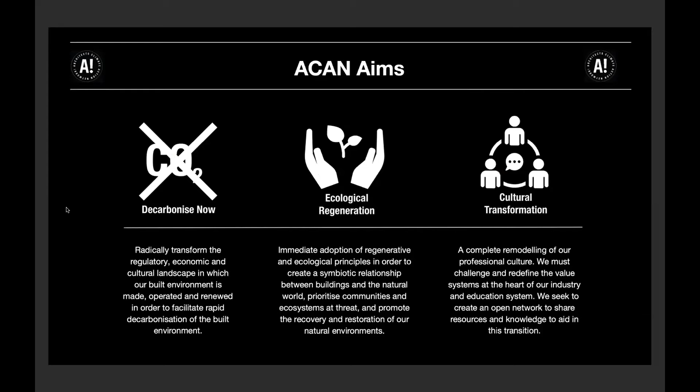Hello. For everyone new to ACAN, we are an open voluntary network of individuals in the built environment industry. Formed in April 2019, it has now grown into a global network of over 3,000 people. It started with a vision for how we could work autonomously as a collective of individuals in order to make rapid decisions and respond quickly to the climate emergency. Our manifesto has three overarching aims: decarbonize now, ecological regeneration, and cultural transformation. You can read more about these here and on the ACAN website.

ACAN is made up of many groups, including 9 thematic groups, of which natural materials is one. Each group is made up of individuals who want to make change happen, and a couple of people from each group take a coordination role to help facilitate the group and any actions. You can hear more about what else is going on in the other groups by joining ACAN, and we will share a link to the other groups in the chat box.

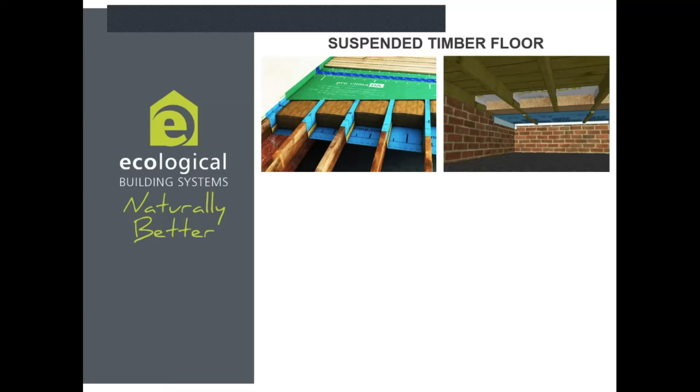Today I'm going to talk about how to thermally upgrade existing floors in traditional buildings. The aim of the presentation is to outline a few methods of insulating ground floors with natural diffusion vapor open materials. That's going to cover suspended timber floors, insulating from above or from below, and moving on to solid floor refurbishment with an insulated screed and glass foam aggregates.

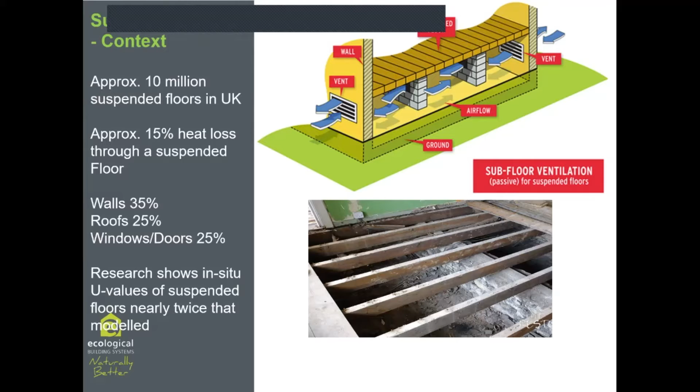It's estimated that there are about 10 million suspended timber floors in the UK. Typically, suspended floors are responsible for around 15% of the heat loss through the fabric of the building. For context, walls are responsible for about 35% of heat losses, the roofs about 25%, and the windows, doors and openings around 25%.

This image shows the typical construction of a suspended timber floor prior to the upgrade. You can see a good separation between the floor joists and the ground below. This is for two reasons: first, it prevents the timber joists from coming into contact with the ground moisture; second, the space below the joists enables the void to be ventilated, achieving moisture or humidity regulation in that crawl space, which is achieved via air bricks.

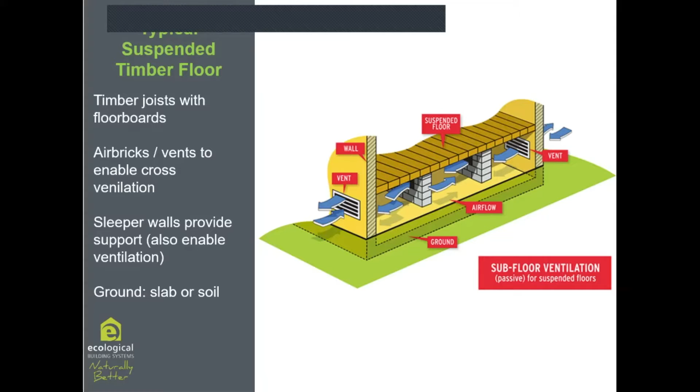The ground below could be either just soil or a concrete slab, for example. And if the ground is particularly damp, you have the option to lay down a damp-proof membrane to eliminate or reduce the humidity that's coming upwards.

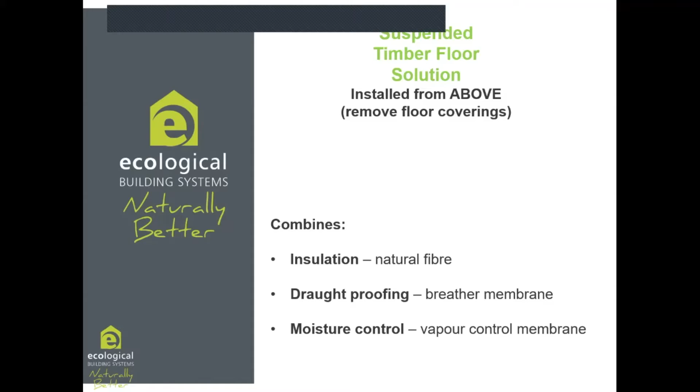So the first thing I'm going to say about the suspended timber floors is how to insulate from above by removing the floor coverings. This methodology incorporates three main aspects. That's the natural fibrous insulation, which is diffusion open, what we call breathable, and also two types of membranes: a draft-proof membrane, which is an airtight but vapor open membrane, and the moisture control membrane, which is an airtight but vapor closed membrane, and I will explain. So basically that's the system we suggest from above.

Well, starting from below, it's the soil, and then the well-ventilated crawl space, and then above that, what we do is that we drape the blue membrane up and over in between the span of the joists, and create like a cradle for the insulation. So we pin the blue membrane on the side of the joists, and there are four purposes basically for this membrane. The first is to eliminate the thermal bypass.

You can see that the membrane is actually sealed on the overlaps, and also it's sealed on the perimeter. So it's very, very well sealed, and it's isolating the air from below to above. So there is no chance that the air gets into the insulating zone, because if air gets into the insulating zone, then the performance of the insulation is significantly reduced because of thermal loops, convective loops.

So that's the first. The second is this membrane provides draft proofing across the full surface of the floor, so no cold air from below passes through the membrane or from any gaps into the warm space above, into the rooms. The third is that, as I said, it creates a supporting substrate for the insulation. And the fourth is that being vapor open, it helps everything to stay dry. So it has the capacity to allow the moisture to pass through and be ventilated out through the well-ventilated crawl space.

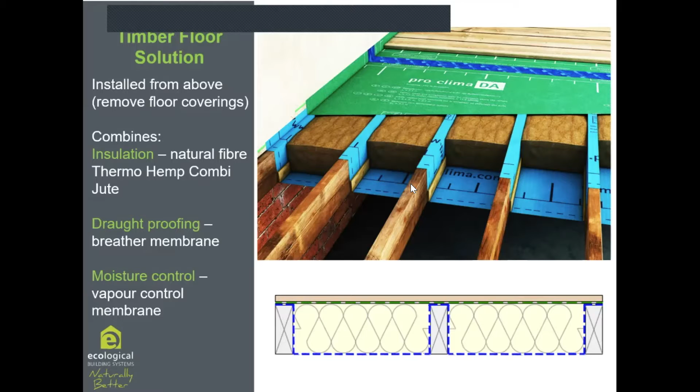As you can see here, it's also taped on the overlaps and sealed on the perimeter, either with a mastic or a tape. So we have a fully enclosed envelope there that performs well from the thermal point of view as well as the moisture point of view, because this membrane, being a vapor control membrane, won't allow any moisture to pass through from above, from the vapor that is in the room towards the insulating zone. So that's the system from above.

Now we tend to avoid using rigid insulation because rigid insulation allows for gaps and won't be fitted perfectly in between the joists. So all these gaps allow for air movement, and the air movement, as I said, creates thermal bypass, convective loops, and that significantly degrades the performance of the insulation, as well as increases the moisture risk. So yeah, we go for flexible insulation.

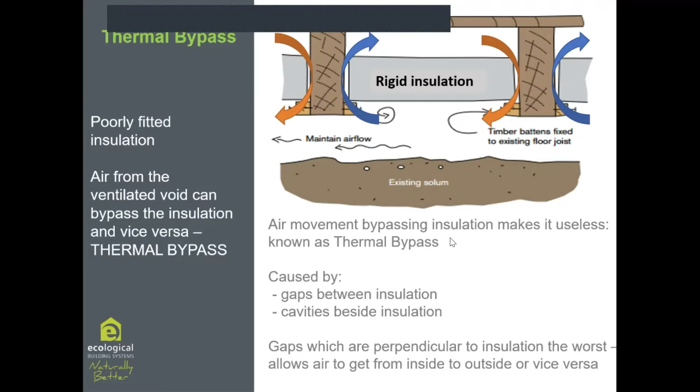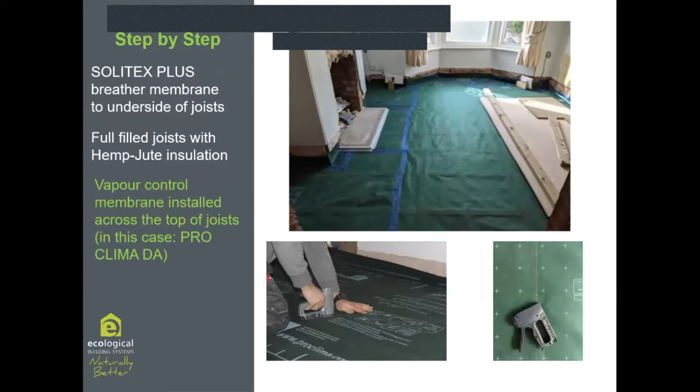And here is an example of that methodology being applied in real life. You can see how the membrane is installed, pinned with supporting batting on the side of the joists, fully sealed on the overlaps and the perimeter, then fully filled with the fibrous natural insulation, hemp jute again in this case, and then on the top sealed with the vapor control membrane. Again, the membrane is taped on the overlaps and the perimeter.

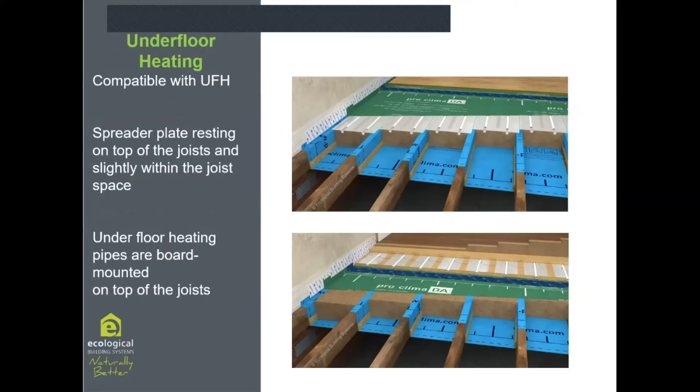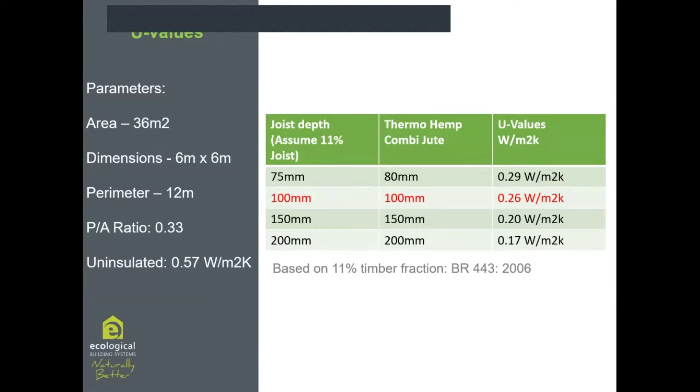This system can accommodate underfloor heating, either aluminum trays or a pre-routed board, so that sits on the top of the joists in both cases. And just to give you an indication of the U values, for a typical 100 millimeter deep joist floor, fully filled with Thermo-Hemp Combi Jute insulation, the U value is 0.26 watts per square meter per Kelvin. And that's for a specific P/A ratio and area, but yeah, just to give you a rough indication of the figures. So that was from above.

Now there are cases where either we want to avoid internal disruption, or it's impossible to remove the floor coverings or the floorboards, and we want to insulate. The only option is to insulate from below. Of course, that requires enough space to work from below, but this gives us the opportunity to also add some more insulation under the joists. This could cut the thermal bridges of the timber and also reduce the overall U value.

So that's the system from below. Again, you can see we use a membrane. Now start from the top. Instead of the green membrane, we use a membrane called Intello Plus. Again, this membrane is an airtight and vapor control membrane. The only difference is that we cut this membrane in strips. So we pin and we seal the membrane on the sides of the timber on each span.

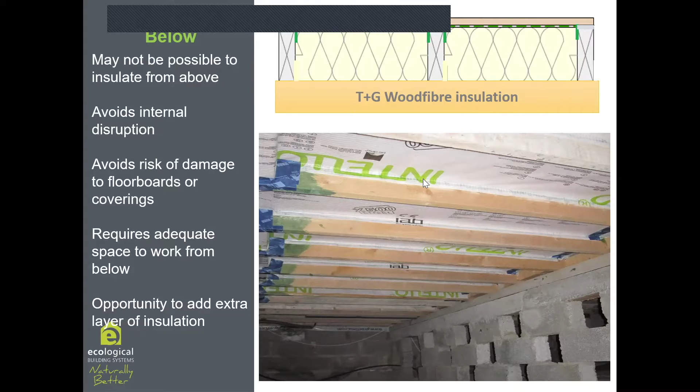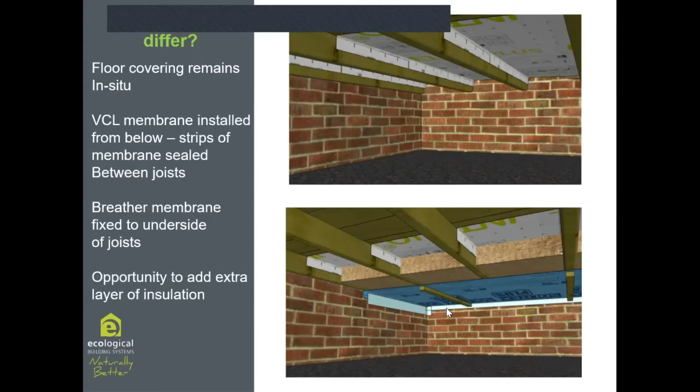And then, yeah, you can see that here. And then we fill with friction-fitted insulation, again, flexible insulation, typically hemp jute insulation. And then on the bottom, we use exactly the same membrane as previously, the blue membrane, the wind-tight and vapor open membrane called Solitex Plus. And below that, we stabilize the membrane using some battens along the joists too.

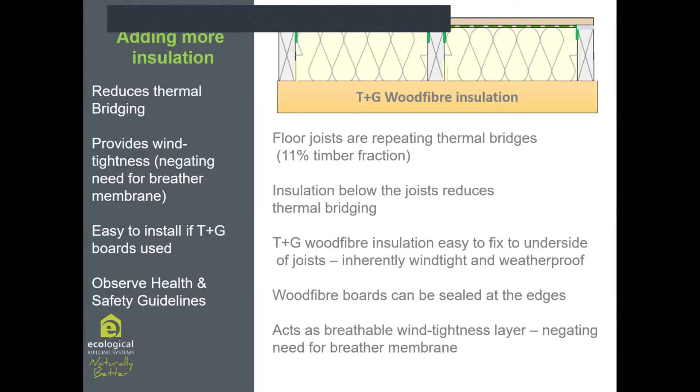So that's one option. Another option is, instead of using as a finish layer the Solitex Plus membrane, the blue membrane, we can use a tongue and grooved wood fiber board that interlocks on the bottom of the joists. And as I said, this way we improve the U value slightly more, and we also cut the thermal bridges of the timber. And again, just to give you an indication, previously we were talking about a U value of 0.26, but by adding 60 millimeter wood fiber board underneath the joists, that improves down to 0.18.

And of course, the floors, when we take up the floorboards, in some cases we meet ugly stuff in there, or in most of the cases. And probably we won't be able to tape properly, for example, the perimeter and everything. I mean, theoretically, everything is fine and easy, but in reality, this may be difficult. So instead of using a tape or a mastic, we have another product we suggest.

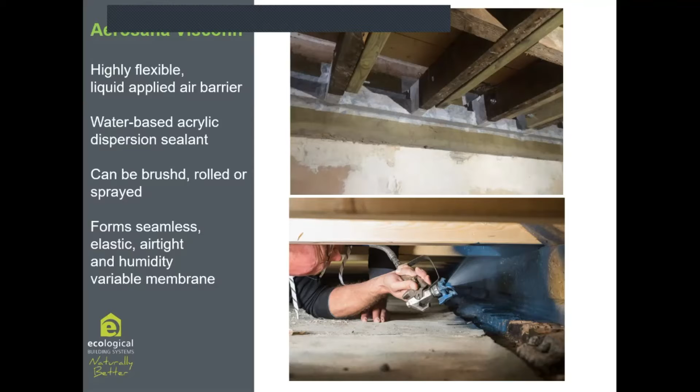It's called Aerosana Visconn. That is a very flexible liquid applied air barrier. Basically, you can either spray it from a distance or from close. So whenever you don't have access or the substrate is not suitable for taping, you can use the Aerosana, and that's a great option for air sealing around different ugly details.

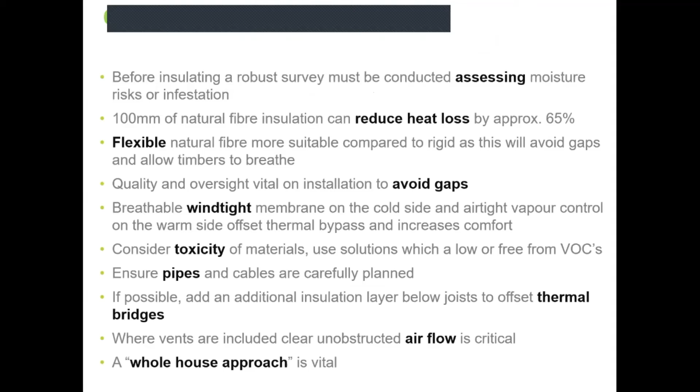So that was for suspended timber floors. Now, moving on to the solid floors. You probably come across this very typical system for insulating the floors: dig down, fill with gravel, kind of like glass foam aggregates, which is a very good insulator, and then lay on top a lime-based screed. So from bottom to top, it's the soil, then a separating geotextile membrane, then the glass foam aggregates, then another layer of the membrane, and then the lime-based screed on top.

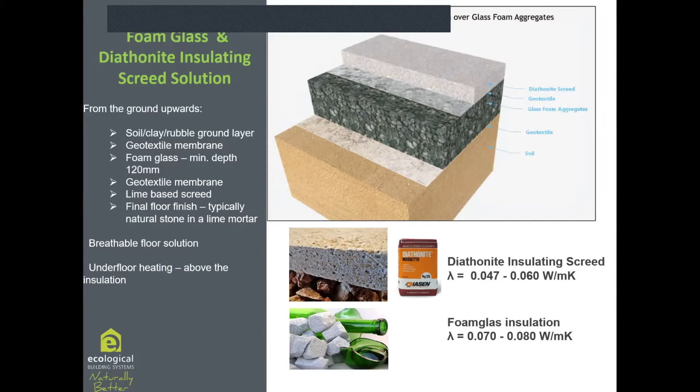Now you can find that system with just lime screed, or we suggest using a Diathonite screed, which is a lime and cork based screed with a very good lambda value, thermal conductivity. So in this case, you can see the standard cement screed has a thermal conductivity of 0.4, the lime screed or a hemp screed 0.08, whereas the Diathonite screed has, actually there are two variations, one with 0.047 and another one with 0.060 watts per meter per Kelvin thermal conductivity.

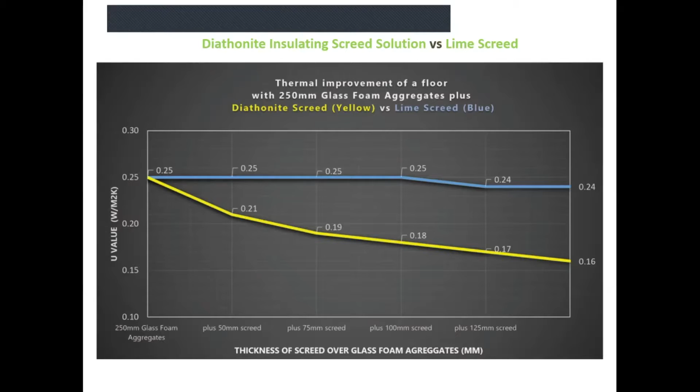And I have a comparison chart here showing how you can further improve the U value by using 50 millimeters of the Diathonite screed instead of a normal lime screed, for example, or 75 millimeters of Diathonite, and so on. So if you are tight on space, then Diathonite screed may be very beneficial. Because with the glass foam aggregates, if you have enough space, you can fill, I don't know, 500 or 600 millimeter thickness of glass foam, and glass foam is a great insulator too, so this may do the job.

But there are cases where the space is very limited, and you can only apply maybe 110, 120 millimeters of glass foam. Then in this case, using the Diathonite screed over the top of the glass foam aggregates could prove very beneficial.

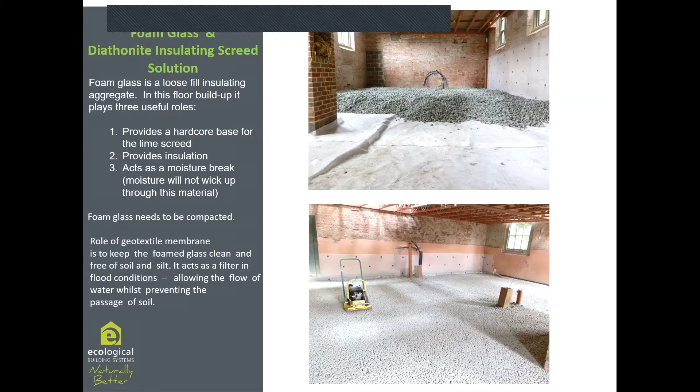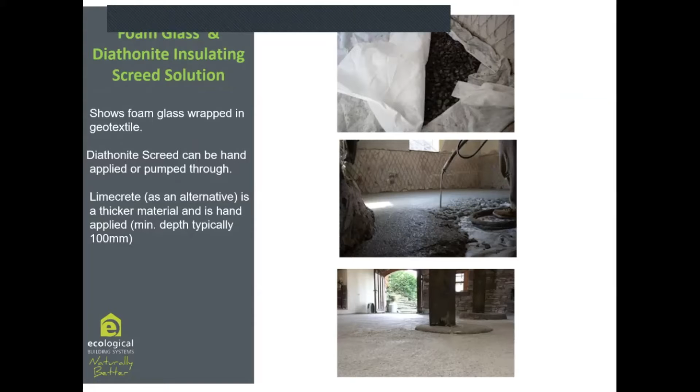You can see here how the glass foam aggregates are wrapped in between those two membranes, and then the screed can be laid on the top, and that's the final finish. On the top, you can apply either tiles or timber floorboards, or even just the carpet. Or in some cases, I've seen people polishing that screed.

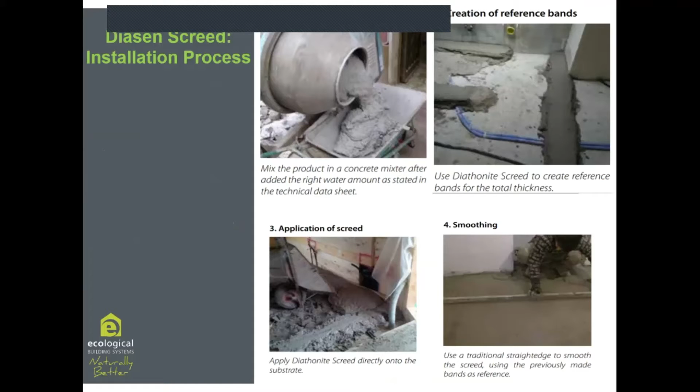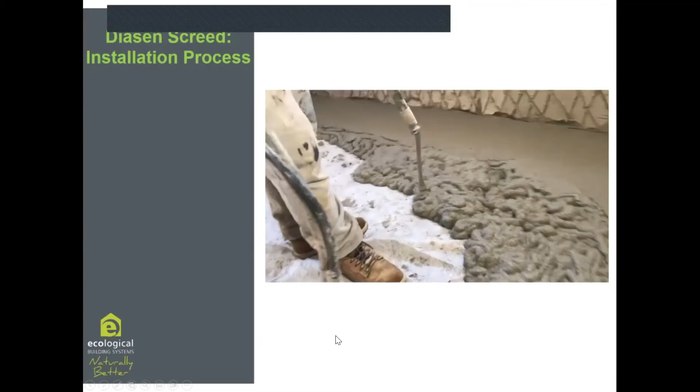In terms of the installation, the screed can be either hand applied, mixed first in a cement mixer, then lay down the reference bands, fill in between the reference bands, and then smoothen with the straight edge. Or a much quicker application is by using a plastering machine and pouring the diathonite screed over the glass foam aggregates and the membrane. Just quickly show you here how easy and quick installation that is.

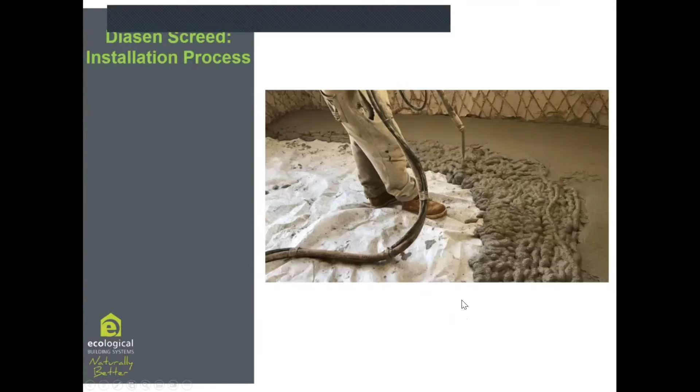That was application above the glass foam aggregates. However, you can also use the diathonite screed above an existing slab, as long as the slab is in good condition without having any water ingress from the bottom, for example. You can use that, or you can tank, and that's what we usually suggest: use a damp-proof slurry coating on the top of the slab to make sure there is no ground source damp coming into diathonite, and lay over the diathonite screed.

You can embed water pipes in it. Just have to make sure you cover with at least 30 millimeters of screed above that. And in some cases you may need to use an embedded mesh. In terms of underfloor heating, you cannot embed underfloor heating within the diathonite because that's insulating, so it won't distribute the heat basically. So if you want to use underfloor heating, that needs to be above the diathonite screed.

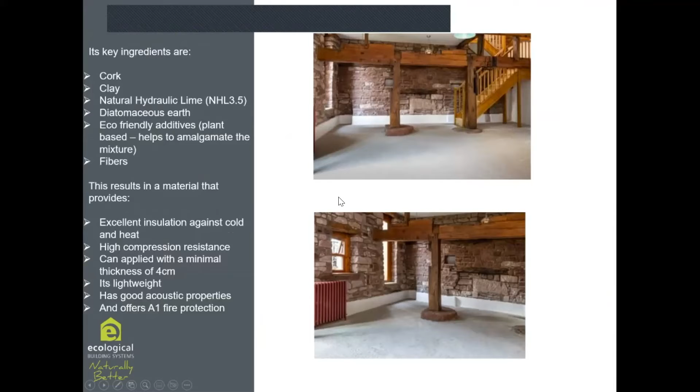And basically that's just two pictures from a project we've done with diathonite screed. You can download both installation guides from the website, or as I said, Vary can share that with you. I made sure I put that in our shared folder, Vary. So that's that basically.

I don't know how well it went, and am I beyond 15 minutes? No, you're perfect. So thank you very much, Ilias. That was really, really interesting. And I didn't know much about diathonite screed at all, so I'll definitely look into that in the future.

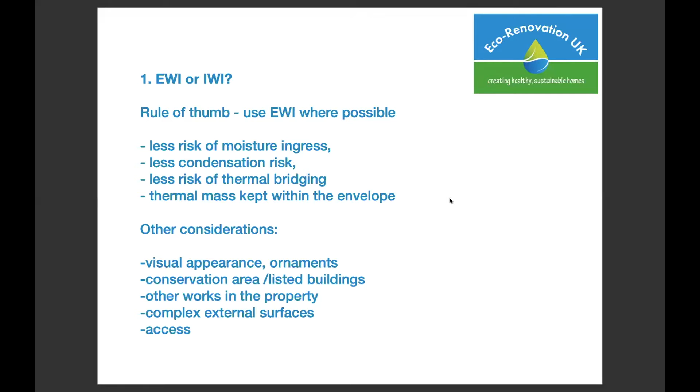Whereas if you're gutting out the whole house internally, sometimes it's just easier to do an internal renovation, an internal wall insulation. Sometimes, of course, you can have such complex external surfaces that you won't go for external insulation in that case. Or access can be a consideration. Sometimes you just don't have access to the external face of the wall, and you have to do the insulation internally. Obviously, there are some other considerations, but these are the main ones.

Okay, so the second one is a bit more interesting. Which material and method to use? The main considerations are really, first, U value. Sometimes you have to or you want to achieve a certain U value or some level of insulation, which with some products would be a little bit more difficult, or it would take more space to reach the same U value.

Another consideration is the finish, and this typically relates to external wall insulation. If you have a render on the external side or a cladding, or you want to keep brick slips or the visual of the brick, they will all define or rule out some insulations. Again, conservation and listed buildings can define what material you will use, because some will be accepted and some will not.

Dampness is an interesting one. Obviously you always have to deal with dampness before you put any insulation in. That's important. But there are some areas where the dampness will define what you can use; there are materials which are a bit more forgiving than others if you've got a damp area. Wall conditions, mainly wall problems, levels, bad brickwork, will all be things which might define what material you choose. And obviously cost is a consideration as well.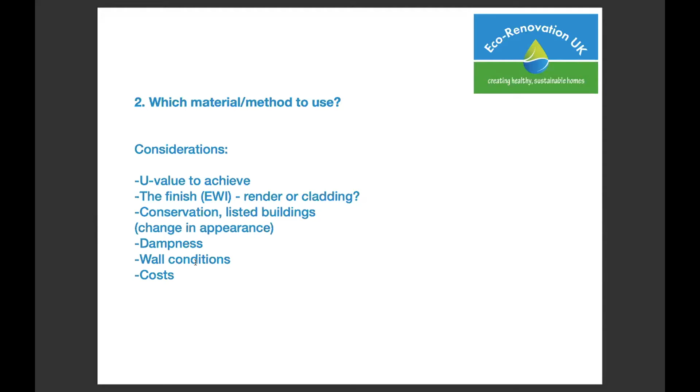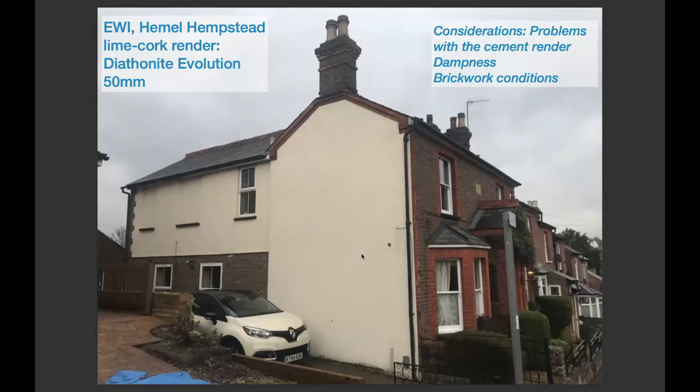Instead, I used the lime cork insulating render, the Diathonite, with a spraying machine, and it's just beautiful. All these holes which were horrendous in the brickwork, we just changed them to thermally efficient little spaces, and we built it up to 50 millimeters.

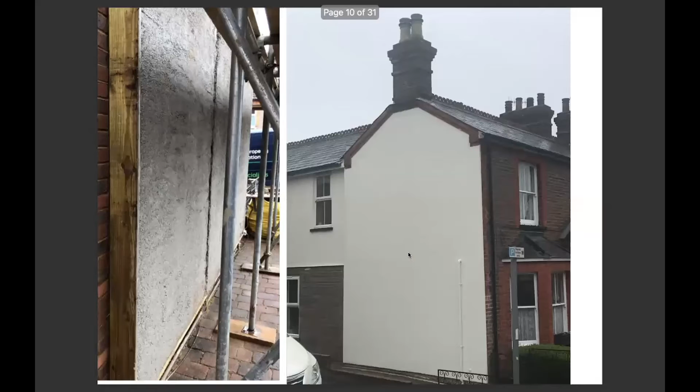After you build it up, on the left-hand side you see that you smooth the render out, the base coat, then you put a lime coat over it, or a vapor permeable render, and that's what will show. It's a wet product, but after it has been finished, you don't see the difference between that and another kind of board insulation product.

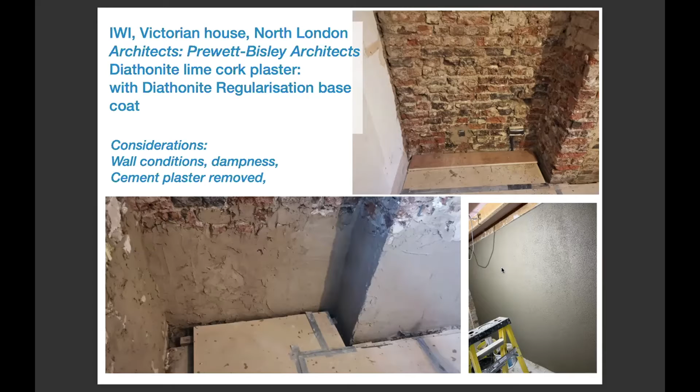So that's what I meant by dampness also defining what material you use. As I said, I wouldn't really use a wood fiber here. I'm quite brave, but I wouldn't be brave enough for that.

I think it's an optimal mix, because I could have used the Diathonite at 100 mil, but the drying time would be quite a lot. Whereas with the 40 mil, the drying time is still good, and 60 millimeters of wood fiber insulation works just well over the top.

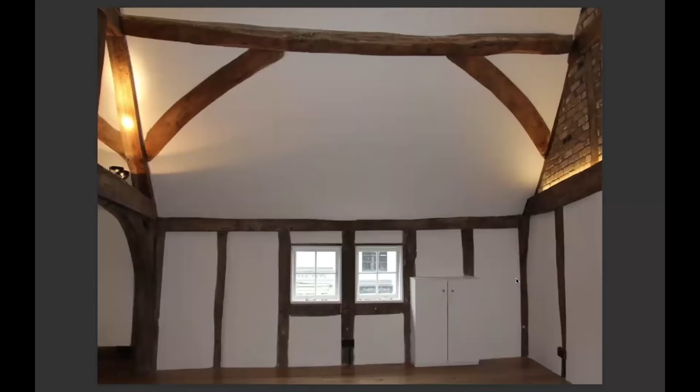So you see all those panels between the timber framing - this is an external wall, you see where the windows are - they are all insulated with a little bit of diathonite insulation. That's a very good example where I can use external and internal wall insulation, which we haven't done externally yet unfortunately, because that wasn't part of the contract. But the conservation officer accepted that we could use the same material externally and internally, so we can achieve a little bit better thermal performance on a listed building from the 16th, 17th century.

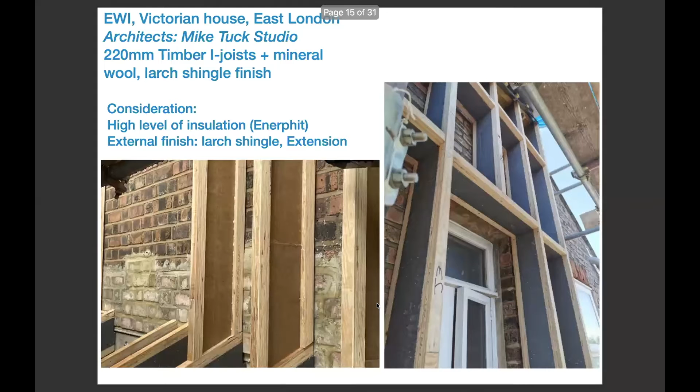Now this is a totally different method, and I've used that only once. I would really like to use it again, although the insulation here was mineral wool, which I really wanted to change to wood fiber because it would work really well, but the client just wanted to use the mineral wool.

The method was that the architect, Mike Tuck Studio, designed timber I-joists here, because the insulation level was 220 millimeter, which is quite deep for external wall insulation - very unusual. With this 220, the idea was they wanted cladding first, but then they changed it to a larch shingle. Then if you put timber studding in, you can fill it with insulation and board it over, or use shingle or cladding or whatever.

I've just seen a question in the chat from when Ilias had his presentation, someone asked about straw board. That's the only reason I wanted to mention this - I've seen that working in Europe with straw bale, because 220, 250 mil of I-joist is just wide enough that you can pack some straw bales in. I'm exploring that now - how can we use loose straw or straw bales with the same system? It would be really nice and obviously very low embodied carbon.

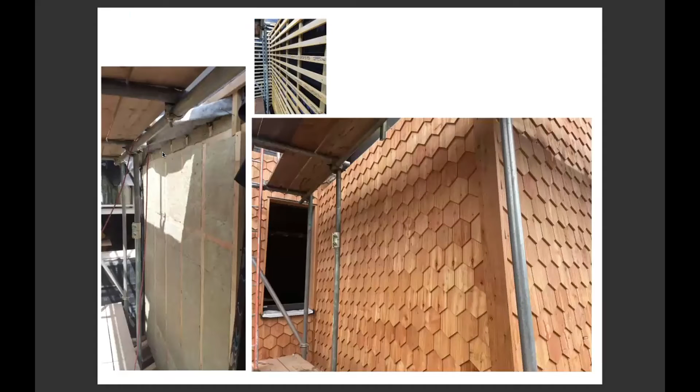That's how it went in the end. So you see on the left-hand side, the insulation put in between the joist system. And then that small top picture shows the membrane and the counter-batten ventilation battening, and then the larch shingle, which is really nice to be honest, at the end.

All right, let's get into the details. I've got a few examples - obviously there are always more, but I put a list together for you so that if you are about to do an EWI or IWI, these are the ones which you definitely need to have a look at and check before installation starts, but there are some other considerations as well.

So at external walls, obviously eaves, fascia boards, window reveals, what do you do at ground level, plumbing and electrics and rainwater goods - these are always a question when you do an external wall insulation. With internal wall insulation: windows, floor and ceiling junctions, interim floors, electrical fixings to wall, and obviously you have to take care of dampness or check that when you do internal wall insulation.

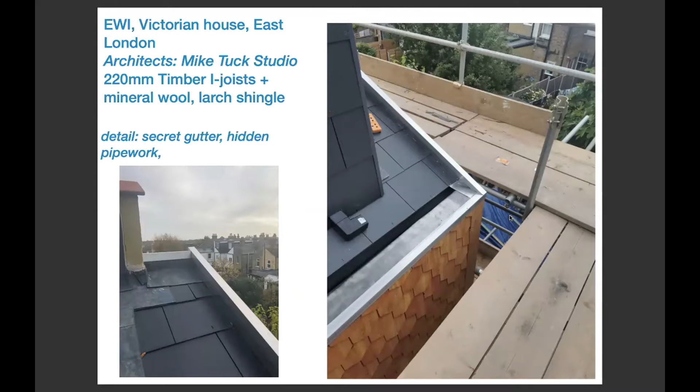So I'll show you a couple of details of how we sorted it - the one I just showed, the large cladding. Imagine all these bits on the list, like all the rainwater goods, gutters, gable ends, eaves - everything has been sorted very clearly, covering everything.

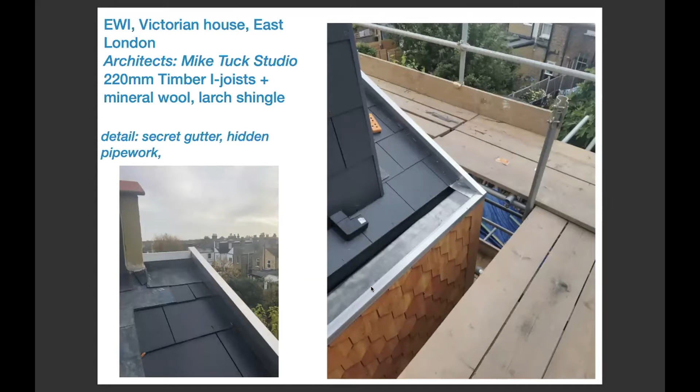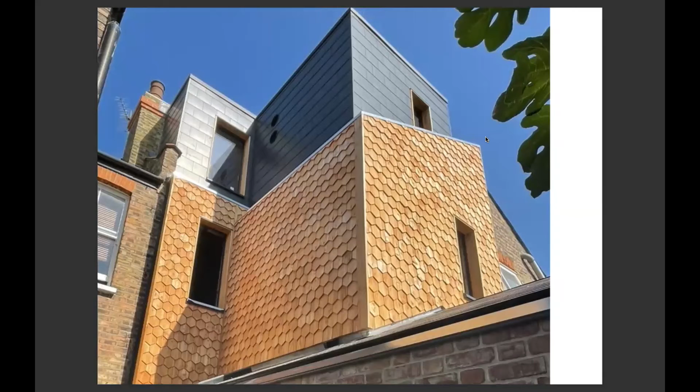It is a secret gutter here. On the large picture, you see that gutter - it is behind the rain screen. There is no problem with the verge trim on the other side. You don't see any downpipe, gutters, pretty much anything. That's what you see from below - it's a nice, sleek design hiding everything. I think this is a brilliant solution, and you can only do that if you've got a large amount of space filled with insulation. You cannot do that with 50 or 100 mil insulation, because you can't hide a 70 mil pipe into that. But this one hid pretty much everything.

Here the client wanted to keep that chunky, large, originally Victorian windowsill. Normally what you do is insulate the whole reveal and then put maybe a thin layer of sill over the top, but she wanted that chunky one. So what we found out is that we took back the whole sill, which was actually brickwork rendered - that wasn't even original stone, it was brickwork and some render over the top.

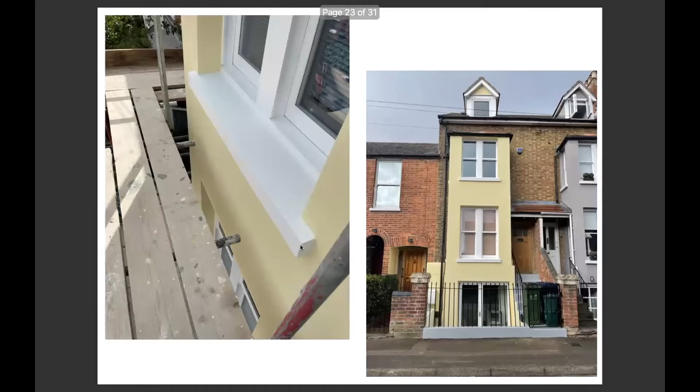But obviously that was a long time, we just couldn't buy it in time, so we just made it ourselves. Once the window sill has been fitted, I could then insulate the reveal with the diathonite evolution plaster. And then the window sill was rendered with a waterproof render and painted over. That's how it looks now, just like the original one, but there is no thermal gap, no airtightness problem behind it.

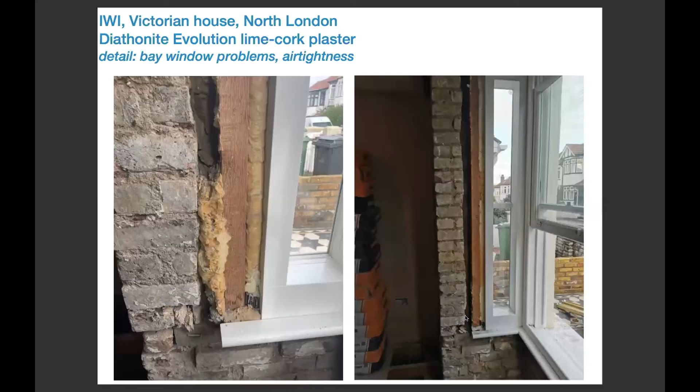That's a problem every time when you take up a window and want to do internal wall insulation. Last week we opened that up and we will insulate it with diathonite internal wall insulation. So we had to sort out that gap with expanding foam and the large gap next to the brickwork, as you see - we have to somehow fill everything in and fit everything nice and tidy.

So what we've done, we've just filled the hole with diathonite evolution, which is just extra thermal performance on that, and we cleaned that expanding foam, and we could then tape it together with the Contega Solido tape, which is a plasterable airtightness tape. Next week, the insulation internally will go over that, meeting the window frame.

Internal wall insulation, a problem always is what you will do with the electrical boxes, because the level will change. If you put maybe 50 mil or 100 mil insulation, all the electrical boxes need to move further in. But the problem is that if you just put timber behind, or double the frame for that box, then you will have a thermal gap behind it. So I found the ultimate solution for that, which is the Bosig board.

That board is an insulated but structural board. You just cut it, fix it to the wall, and you can fix the electrical box on the face so that it meets your new level. That black thing you see behind it is the liquid airtightness membrane, which you've seen on Ilya's presentation as well - it's for the airtightness.

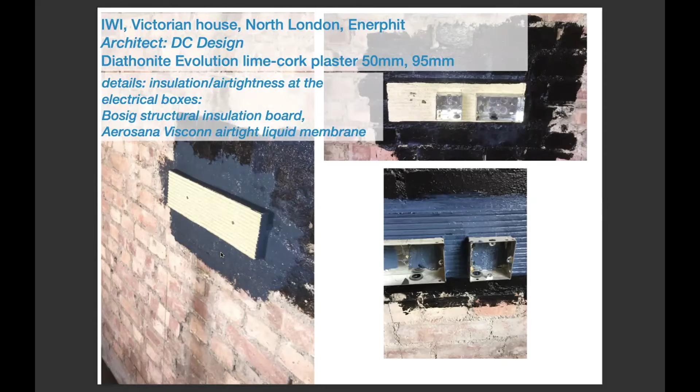Interim floor structures, very important when you do internal wall insulation. It's not from floor to ceiling - it's beyond the ceiling and beyond the floor, because that's how you can meet the other insulations, and that's how you won't leave a thermal gap.

And two small examples, lastly, for floor and wall junctions, which is again critical. On this project, we have done an internal wall insulation and floor insulation together, and the suspended floor insulation somehow needs to meet the wall insulation. That's what we should somehow achieve.

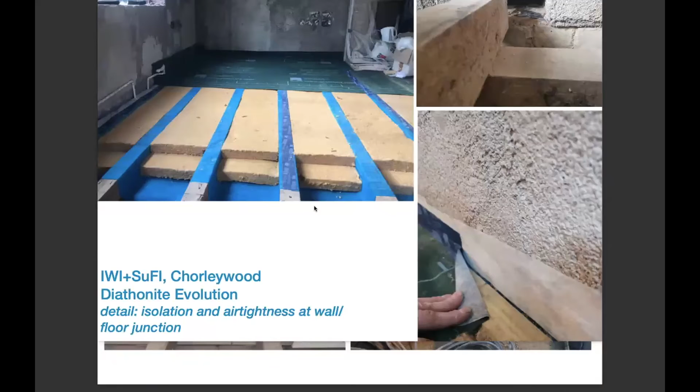Now, what we've done, you can see on the top picture, that the insulation, which is the lime cork render, comes down to the bottom of the floor level, so that it can meet the floor insulation. Once the floor insulation has the airtightness membrane over the top, that's how you tape it. That's the last picture, as you tape the airtightness membrane, which is above the floor insulation and next to the wall insulation. And the last picture is showing another problem which always needs to be sorted.

That's the subfloor ventilation. The problem is usually that the floor ventilation grills are at a higher level. They are not at the subfloor level, but at the floor level. Now, if I insulate the floor, I will block the ventilation, which I can't do. So in that case, you have to prepare the surface and that hole, and then use a telescopic vent or some sort of ventilation channel so that you can channel the ventilation down into the subfloor. That's how it looks.

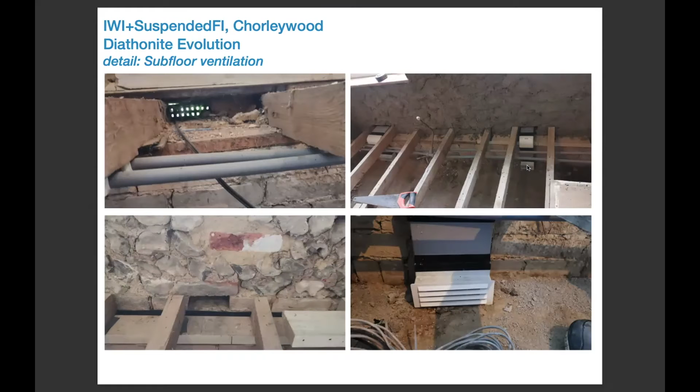So yeah, thank you very much for your attention.

How was I time-wise? Was that okay? That was great, Adam. You were a little bit long, but I didn't want to stop you because it was incredibly interesting. So thank you very much. No, thank you, Adam. Okay, I'm going to hand over to Richard Oxley from Oxley Conservation, who's going to talk about roofs. Thanks, Richard. Thank you very much.

Good evening, everyone. My name's Richard. Historic building consultancy based in Henley-on-Thames since 1997. And I usually encounter retrofit when we take the opportunity of repair to improve the thermal performance of the building.

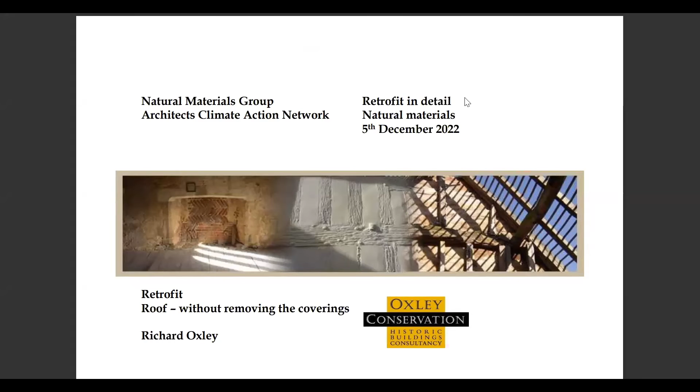So this evening we're looking at roofs without removing the coverings. It's easy to retrofit and achieve efficient and effective detailing by removing the roof coverings, because you can get at every nook and cranny and all the junctions, just as Ilyas and Adam have shown. The junctions and the detailing are very important and the most difficult ones to address, and that's the same across different types of roofs, gables, valleys, everything. So roofs are very complex structures in their own right.

I'm just going to show you some examples of where we've removed the roof coverings, to give you an X-ray vision of some of the details you'll have to overcome or take into consideration if you want to leave the roof coverings intact, or have to.

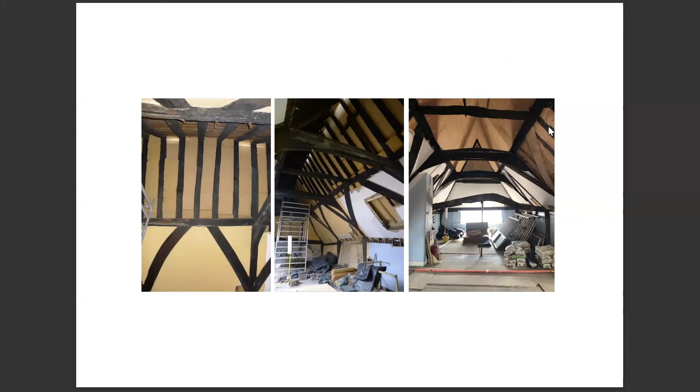This is a grade 2 listed building, and you've seen from the underside, it has been stripped and recovered and provided with insulation bats between the rafters and a sarking insulation board over the top. We've also used a wood fibre insulation board from the underside where the plaster didn't get removed, because it's increasing the depth of the thermal mass for the building, which is a large benefit, as we're trying to stop heat loss and heat gain, which is becoming more of a consideration. That's before on the left and after on the right, and then the refurbished room internally.

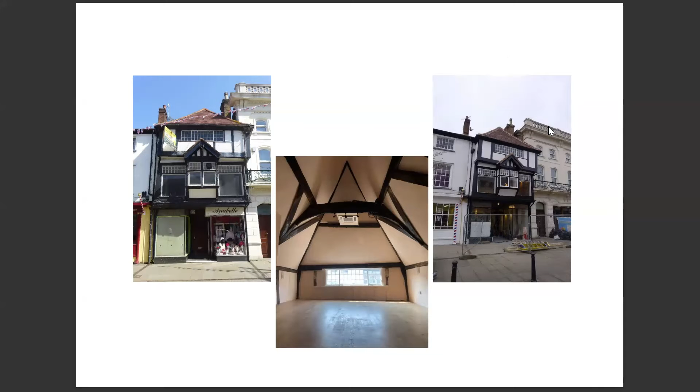The next one is a grade 1 listed building where the roof needed recovering, and this is looking at the dormer details. There's the roof, the slates—Westmorland slates—were starting to deteriorate, and it's grade 1 listed, so we had to take into consideration some of the constraints of that listing, trying not to change the appearance. This will come in useful later on when we look internally, but it shows you some of the constraints and potential solutions.

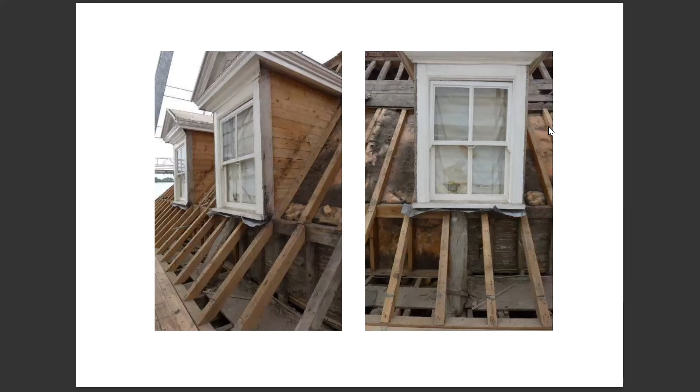There's the roof stripped back, and you can see that there's lots of junctions and detailing to take in. Therefore, we're starting to build up with a wood fibre insulation board underneath a T&G board, and this again provides good thermal mass.

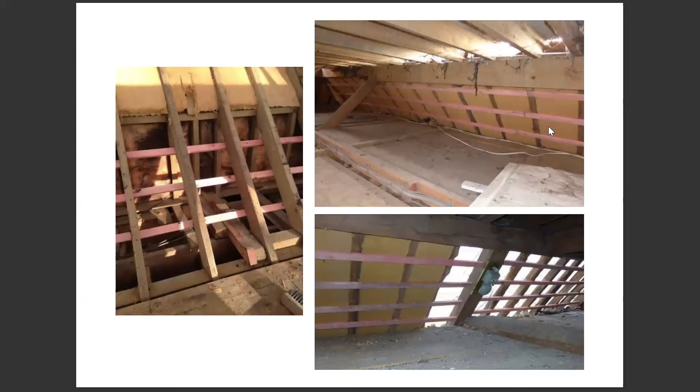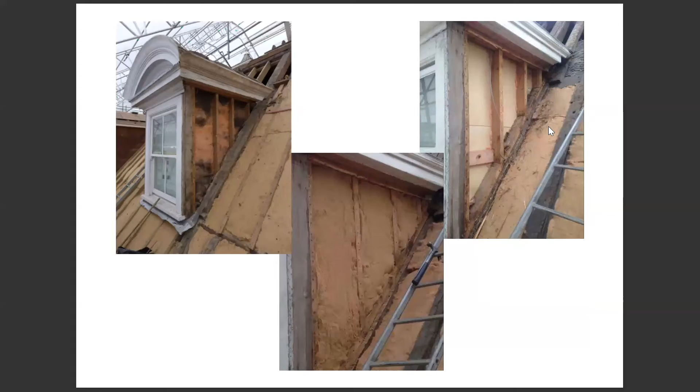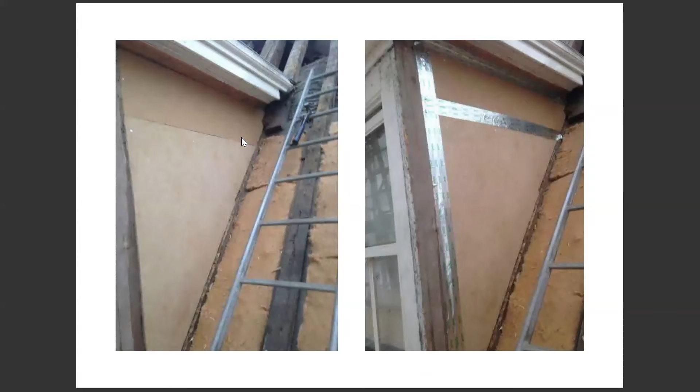From the underside, we had to put roofing battens on the underside of the rafters to hold the insulation in place. Here's a build-up journey of removing the 1-inch thick 1960s insulation on the far left-hand side, and then building it up in between to get some depth in. Then here comes the detailing. We've seen loads of tape used, and it is a good way of providing an airtight seal at the junctions, and the junctions are very important.

And this building here, if you can see this, we're trying to minimize the increase of depth. So all we're going to be doing is increasing the actual depth of that insulation by 2 inches. Does it meet high performance standards? No, but we were working with constraints and doing the best we could in the circumstances.

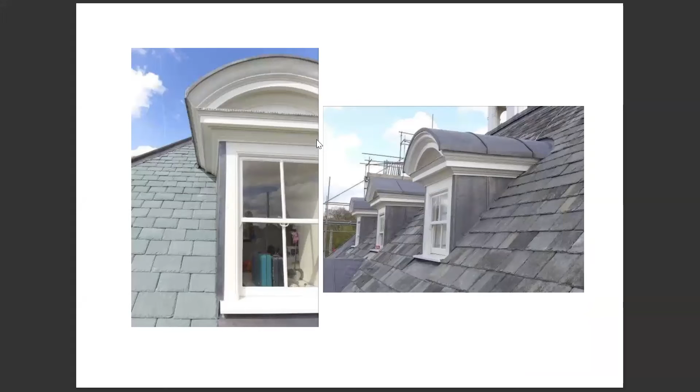And what we will find when we're doing internal retrofit is that there are many instances of this where this example is inverted. And there's a finished detail where you'd have to have a knowing eye at very close proximity to be able to identify that. So there's the finished product.

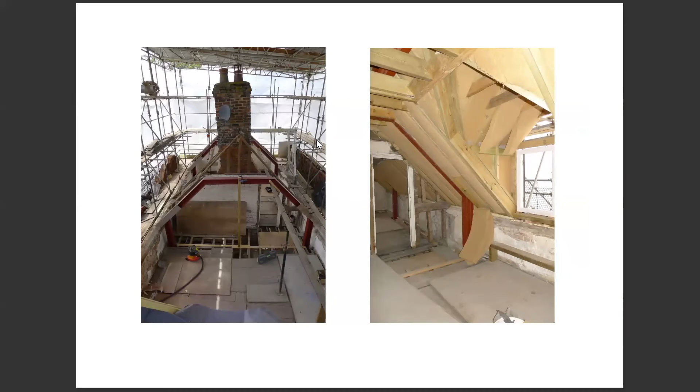Other opportunities: this is a structural repair where there was roof spread and we had to put steels in, and then that gives you basically a carte blanche to put effectively a modern roof over the top, fully insulated. Another example is where the roof and the historic frame needed repair. There were structural issues. This dormer got changed from a flat roof dormer to a pitched hip dormer. And again, the gradual build-up of the insulation layers and the cladding, and then being dressed in lead.

And trying to keep also the depth of the cheeks here at the side of the window quite thin, so it didn't become too fat. So the attention is in the detail, and that can influence the materials you want to use.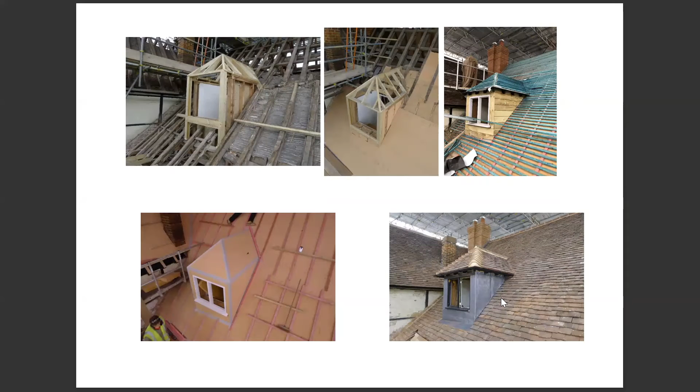So I'm just looking at my notes here, so bear with me, go back again.

All right, so now we've looked at stripping the roof. So what are the reasons why we can't strip the roof? Well, one would be, say if you're buying a new building and the roof is in good order and it's got another 30 years left, you don't want to spend 20, 50, 60,000, whatever it is, on stripping and recovering the roof. You may have access constraints, so it's difficult to get access to the roof, and the scaffolding costs alone may be prohibitive. And so cost comes into it. Money is going to be an issue.

Levels of disruption in terms of neighbours, the street or whatever, and the physical limitations, which I'll show later with different types of terrace housing. As already mentioned, listed buildings, you need listed building consent for a change of appearance. You can get listed building consent for a change of appearance. It's never always a no. And there are possibilities of doing that, but you'd have to work to try and minimize that change.

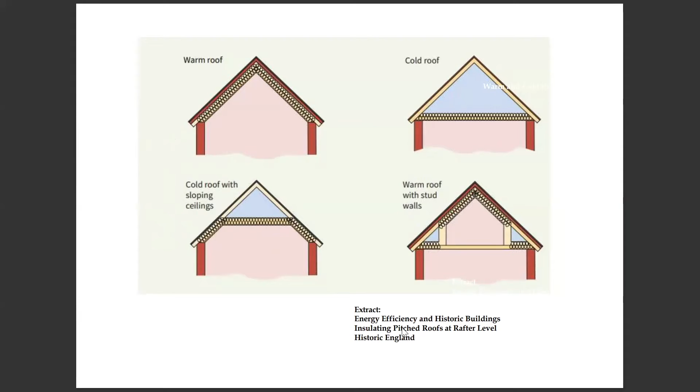So this is a case study, which is a new one for me, where we're not looking to strip the roof, just light overhaul, and it is an attic room, effectively 1.5 stories, with dormers in practically every room. So everyone knows or should be familiar with the warm and cold roof concept, and we're really going into a hybrid roof here, where we've got a cold roof in the attic space, and then we've got sloping ceilings. This is taken from the Historic England insulating pitched roofs and energy efficiency in historic buildings series, which is a good resource.

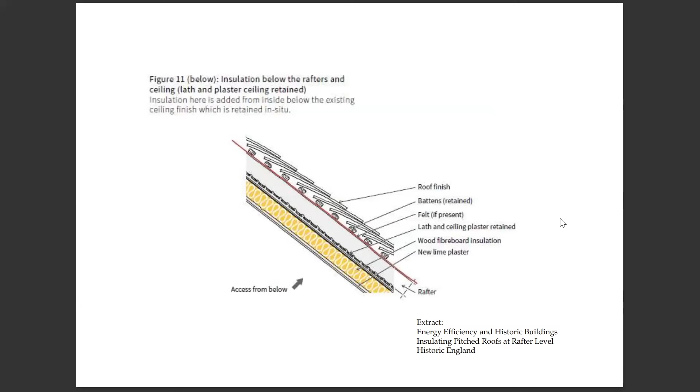So we're dealing with this hybrid, and this is within this Historic England guidance, how to insulate only gaining access from below, where you're keeping the roof, possibly the roofing felt if it's present, and building up insulation layers below. And as you can see, there's no way that this is going to meet building regulations or energy performance requirements compared to a new building, but any improvement is beneficial.

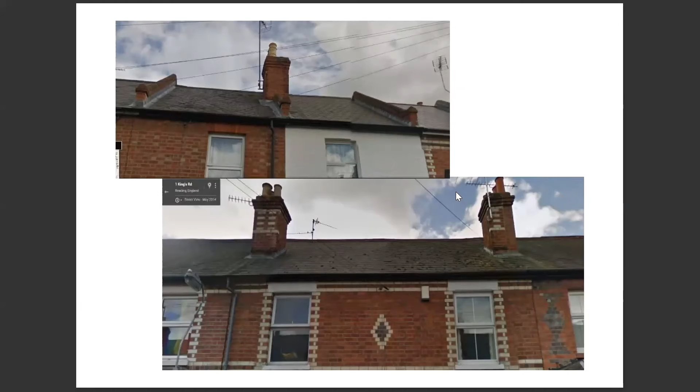So another consideration is in this one where you have upstand party walls, and that would actually allow possibly insulation over the rafters. So coming from above, you could strip that roof, but then you'd have to take into consideration this rainwater goods here. So how's that detail between the neighbours if you do that? Probably very difficult, and you're probably looking at internal retrofit. This one, you'd need the whole terrace to be stripped and recovered at the same time. Otherwise, you've got a difficult junction on the party wall lines. So really, we're looking at internal retrofit as an option.

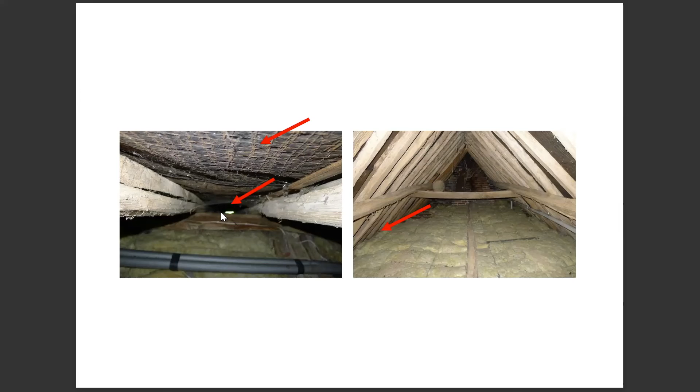So that's a difficult consideration, because also here this is a very thin rafter, about 3 inches, 4 inches, which is about 75 mil in new money, and so that then limits the amount of insulation we can actually get down into that sloping ceiling. And how do we do it? So that is a difficult area.

If you look at the number of junctions and issues, we've got all the issues with the flat ceiling here, the sloping ceiling. Can we get insulation in there? Or do we go back and say we can't get insulation in there that will be effective? Can we provide insulation boarding on to the underside? Which is probably the best solution in that instance.

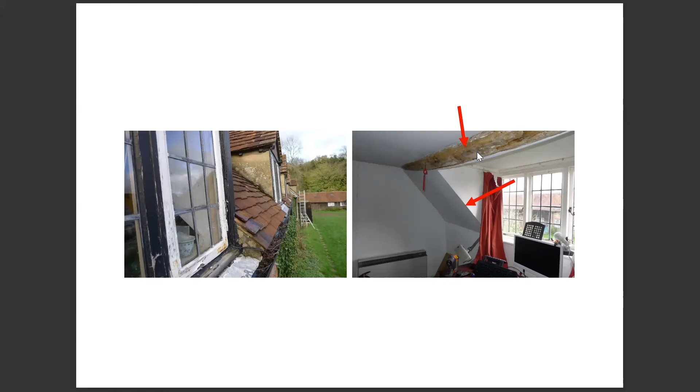But then we've got an issue here. If it's a listed building, can we conceal that purlin there, which is partially exposed? Do you want to retain it? But if you do, you're causing some gaps and difficult to detail areas where you're probably going to get air infiltration and therefore drafts and everything that comes with that.

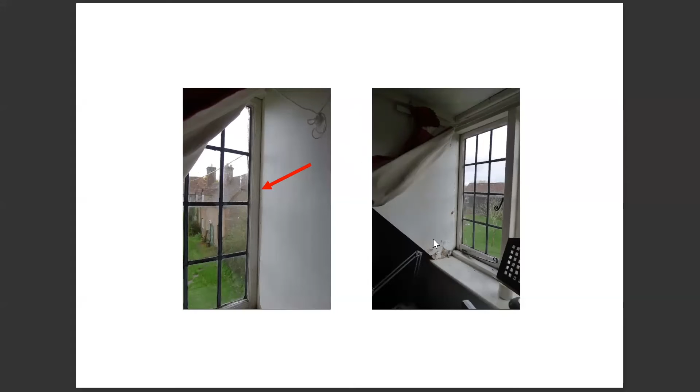Here is the junction between the cheek of the dormer and the window, and you can see that there's very little space there that we can actually get the insulation in. So that may mean, like the inverted solution we did with the grade 1 listed building, we remove the internal face and then put the insulation build-up in from that side. But then you've got different issues with vapor checks and membranes. How do you detail them? So that's very difficult. And again, the solutions are difficult, and you've got to consider how to minimize those risks.

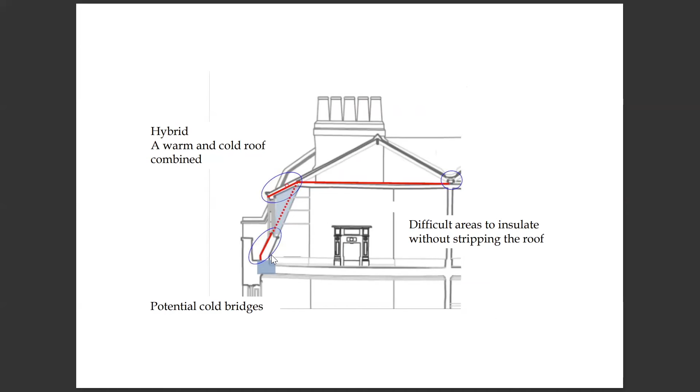So that's what we're dealing with, this cold space, which has got to be ventilated, and basically a warm box there that we want as airtight as possible. So this is a typical sort of London terrace with a dormer construction, showing the blue areas which are potential cold bridges, and then the circled areas are difficult areas to insulate without stripping the roof or building up internally. So when we're building these things, what are the design considerations?

Well, are we preventing heat loss or reducing it? And we've got to be realistic and say that we're not going to achieve modern day standards, because we can chase different sort of measures of either heat loss, U values or whatever you want to use. But at the end of the day, we might not be able to achieve it, but some gain is better than nothing.

We've got decrement delay, which is important, especially if you're in an attic space, because in the summer that could be very uncomfortable. And so what we're looking at is trying to achieve a 12-hour delay to prevent the heat penetrating the roof, and then it cools down in the evening. Again, may not be achievable, but something's better than nothing.

Air tightness: if you're using a new roofing felt, you've got to make sure it's bat friendly if there's bats going to be present, but also we're looking at tapes and various ways of making the building more airtight. And you've seen the spray-on plasters and renders, which could be very good, because a good way of making a building airtight is applying a render or a plaster. So that's another way of doing that.

Vapor permeability, ability to dry out. This is quite important because wet fabric has a poor thermal performance compared to dry fabric. So if your building fabric is able to dry out and doesn't hold moisture, that's good. And then there's a balance of the hygroscopic vapor permeable materials like wood fiber, which we're going to be using or advocating in this case, because it has those very qualities. So it needs to be able to dry out as well.

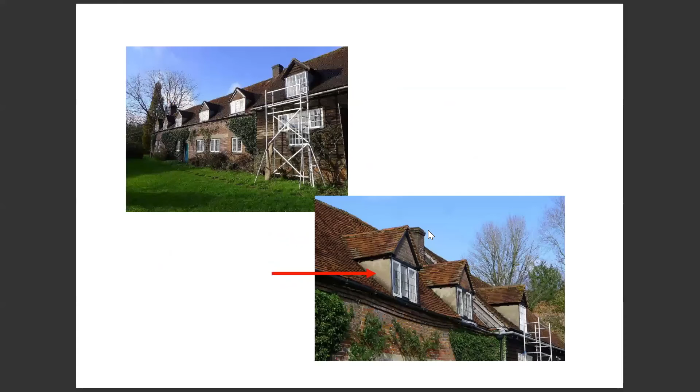So we're, oh, sorry about that. I didn't realize I could do that.

So the existing fabric, we've got conflicts, and some of these have already been mentioned by both Ilias and Adam, where we've got a conflict between putting in perhaps a vapor permeable, breathable system against impermeable materials. I noticed on the chat that someone was asking how to do that, and Ilias sort of mentioned something as a solution. And so we've got to look at are the materials compatible, and what are the benefits? We've got to be aware of the dangers of reduced ventilation pathways.

And also we've got to be aware that internal insulation is probably going to reduce the internal space available by making intrusions into the walls. And that may affect internal joinery such as skirtings, architraves and such like. So there are limitations in the improvement you can achieve. But what we can do is make what insulation we do put in robust, and maximize what we do put in by focusing on the junctions and the detailing.

We talked about the listed building status and the constraints that can have. Any alterations in a listed building internally or externally require listed building consent if it affects the appearance or the character of the building, mainly the character of the building, which is open to debate. So if you're replacing, for example, lath and plaster ceilings with a wood fibre ceiling or any other type of ceiling, plasterboard, that would require listed building consent.

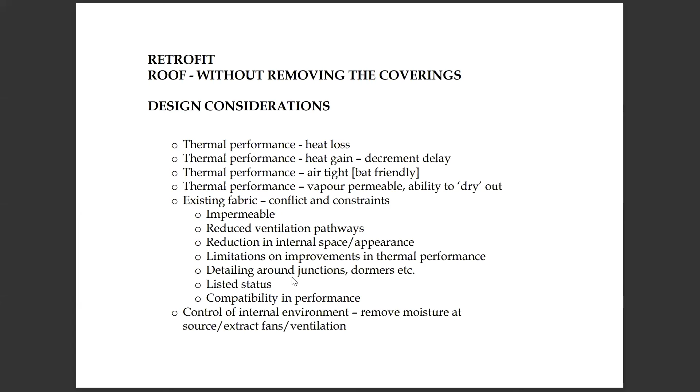Compatibility in performance is very important, especially with the old historic buildings, because what we're trying to do is maintain breathability wherever possible. And a big factor that we can help the building with is removing moisture at source, so extraction fans, and maintaining means of providing ventilation, so warming air, cooling air, and also purging, basically, high humidity levels.

Why have I chosen wood fibre insulation? I think basically I've been using it for so long, really. I'm comfortable with it. I don't have a vested interest in it or anything. It's a material that has good characteristics that are compatible with all materials. It's very forgiving. It also acts as a very good thermal and moisture buffer, so it can reduce thermal shock and moisture shock, so reducing risks of condensation and therefore mold growth, which is good for the building and the occupants. So these are the sort of things that we can advocate for wood fibre, and it's also a good usable material.

It's easy to use in terms of cutting and fitting, and it's also relatively flexible, so you can still have undulations and things in roofs, which is aesthetically pleasing, but also it prevents additional costs in terms of furring out timbers.

So I think an important consideration in all this is, how did the building perform before retrofit? Was it damp? Was it heated? Was it ventilated? And when you implement changes, how will it perform after? So really, what are the consequences of change? Because that could influence your solutions. So again, carry out a pre-mortem in terms of trying to figure out where the conflicts are and where the problems will be, and try and design them out at source if possible.

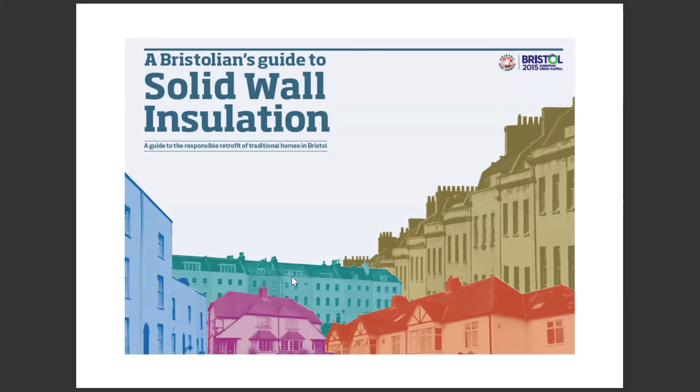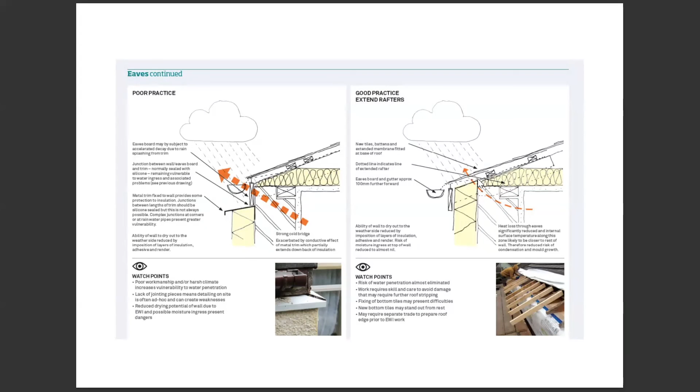Something, you know, on Adam's presentation, where he talked about details, and it's at the junction of a roof. And so this is basically an example of a pre-mortem where they've identified that there's a high risk here if you put an external insulation and there's a gap. So if you block that, then you're reducing the risks of condensation and cold bridging. But then some people don't read the guidance, as you can see here.

So what I've come to say really is looking at a retrofit without removing the roof covering is difficult, and compromises have to be made. But I think in most cases, a lot of people don't have the opportunity or affordability of stripping the roofs. So if we're really serious about retrofitting this existing housing stock, and you've seen from the buildings that I've shown that a lot of those need to be upgraded if you want to use the attic space, therefore this is a way of getting more buildings solved than actually doing a full retrofit by stripping the roof. And it may have a shorter life, but we are trying to get somewhere very fast in terms of retrofit.

So that's it, Steph, over to you. That's great. Thank you ever so much, Rich. It's really interesting. And I really like your philosophical approach of a pre-mortem. So yeah, and thank you to all the speakers for some brilliant examples and some great technical insights, because I think we've not really had an event like this before. We've dug in so deep and it's been very successful. And I think the chat box has reflected that.